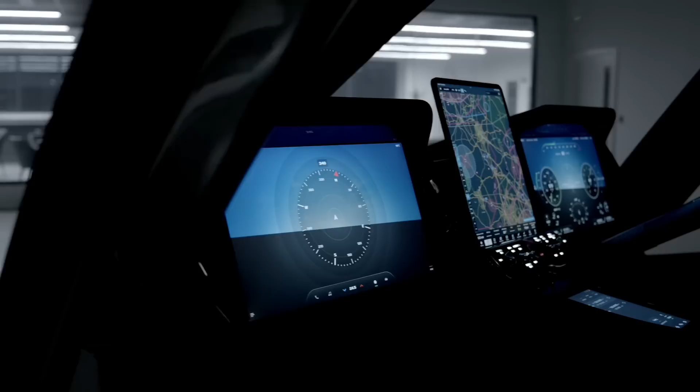Hill is an aerospace manufacturing company with one simple mission. We're making flying cool again. Our beautiful HX50 makes you want to fly, and by manufacturing everything in-house, we make it affordable so you're able to fly. Together, we're creating a general aviation renaissance. We call it GA 2.0.

For you, it means a breathtakingly beautiful new aircraft, ready for sustainable aviation fuels and connected for the modern world. Our all-new ownership operating system supports every aspect of HX50 ownership, from in-house insurance to comprehensive warranties and power-by-the-hour maintenance to pilot training and active safety management, keeping you and your family safe.

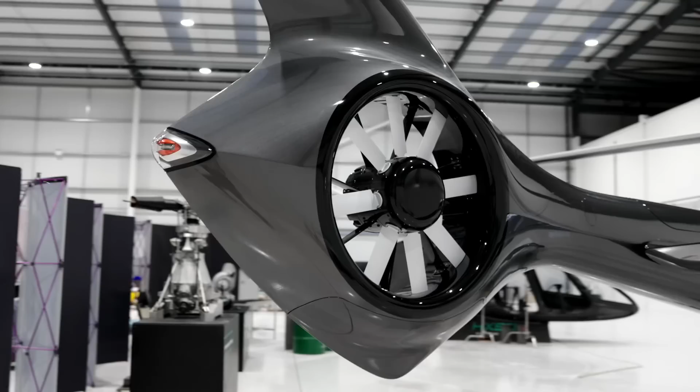Together, we've built the Hill Global Community, a place that provides easy access to the very best that the helicopter lifestyle can offer, globally and amongst new friends. Clearly, the scale of this task is vast. Create an all-new class-leading helicopter. Create a pioneering, affordable turbine engine. Create an all-new digital cockpit.

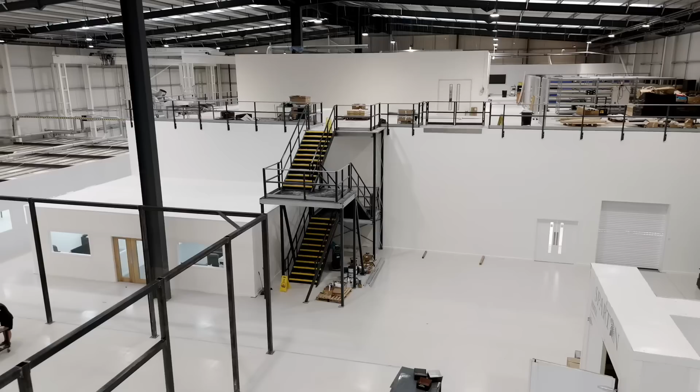And then create all of the processes and all of the infrastructure needed to manufacture every single part. Then build it, test it, and approve it. Tonight, we'll showcase all of the progress from across the program on how we're delivering on each of those objectives.

Producing a next generation turbine engine is a very big deal, but not because it's difficult. It's because it's absolutely crucial to being able to deliver next generation light aircraft at commercially viable prices. Consider this. There's less than £10,000 of expensive raw materials in an engine of this size and type. And the equipment to make these components has never been more readily accessible. And we have it all right here at PC1.

Sure, these machines are complex and extremely highly strung, but the design, analysis and testing equipment and the knowledge that we have available today right here at PC1 far exceeds what the guys that did this originally back in the 60s, 70s and 80s had available to them. That's not to downplay the difficulty of the task. This is difficult, this is complex, this will take time. But before we even start, we know that this has been done before. We know how to make this work.

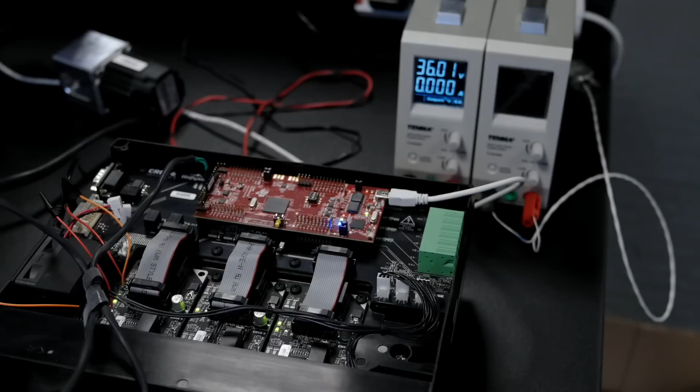Let me take you now through each of the parts of GT50, piece by piece, and I'll show you exactly how we're doing just that. Unlike traditional engines, the GT50 uses a high-speed, high-frequency, high-voltage direct drive starter generator unit. This unit consists of two groups of components: the mechanical assembly, which includes the rotor, the stator and the casing, and then the power management unit, which is all the electronics, hardware and software that control and operate the device.

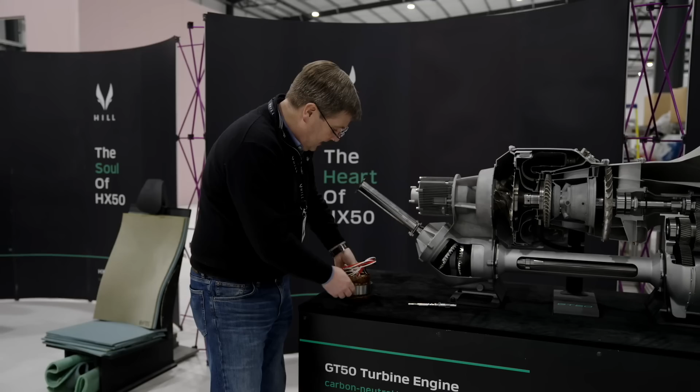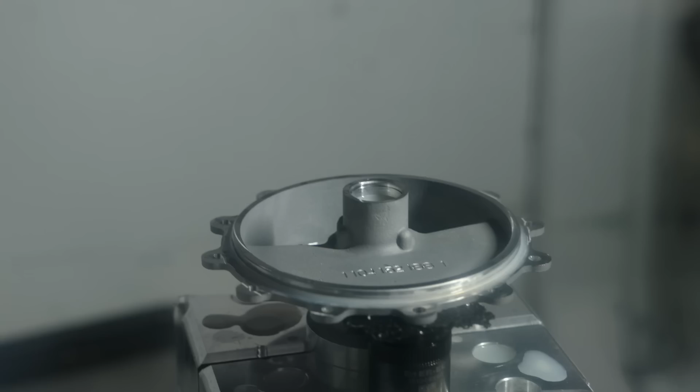We've now completed the prototyping of the drive shaft. This is the stub shaft that sits on the end of the gas generator and drives the rotor of the starter generator. And then also the stator and windings, so the laminations, the windings, and the wire terminations that come out of the back of it. And with those in hand and the final casing currently on the 5-axis machine, it's time to assemble it and test it.

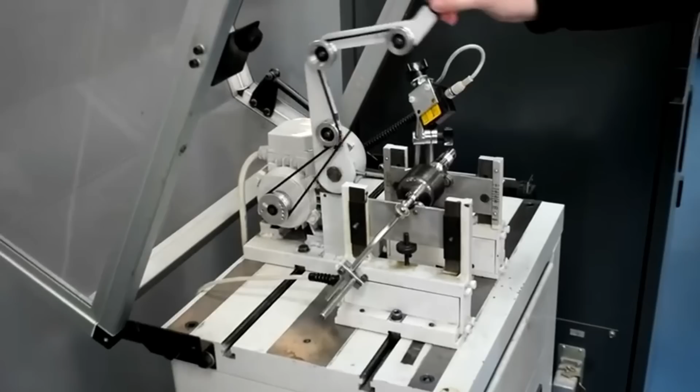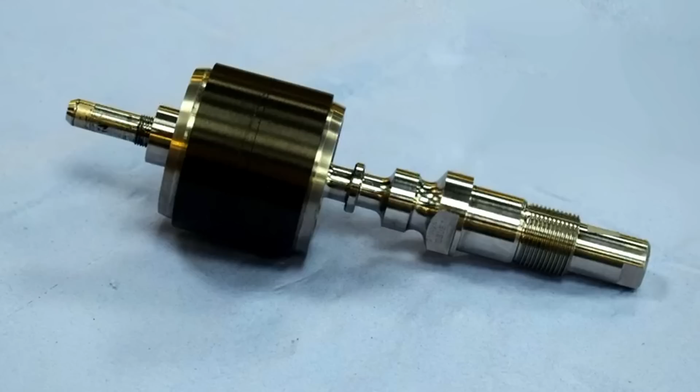Given that the starter generator runs at 50,000 RPM, it's important that the system is both statically and dynamically balanced to ensure smooth running and avoid harmful vibration. In order to do this, when we designed the rotor, we built additional areas of land on all of the rotating parts that can be subsequently machined away as the system is both statically and dynamically balanced prior to assembly and use on the test rig.

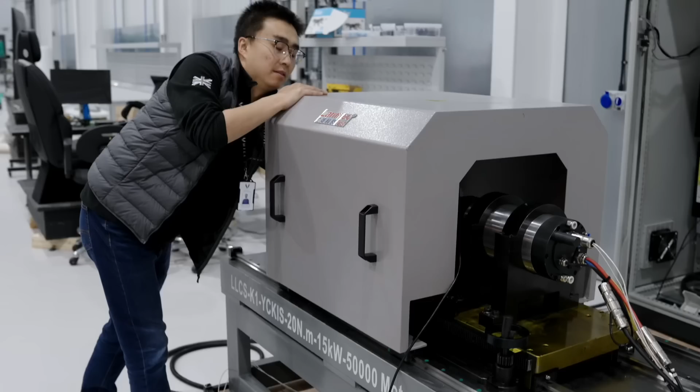With the rotor balanced and the stator electrically tested, the system can be assembled with its casing and connected to its brain, the PMU. In parallel with the development of the flight hardware, we've also been designing and commissioning the specialist test equipment necessary to test and qualify the system, and then building a lab around it. And here it is. This is our fully commissioned high-speed test rig, which is about to start testing the motor and generator functions of both the mechanical and electronic hardware of the starter generator.

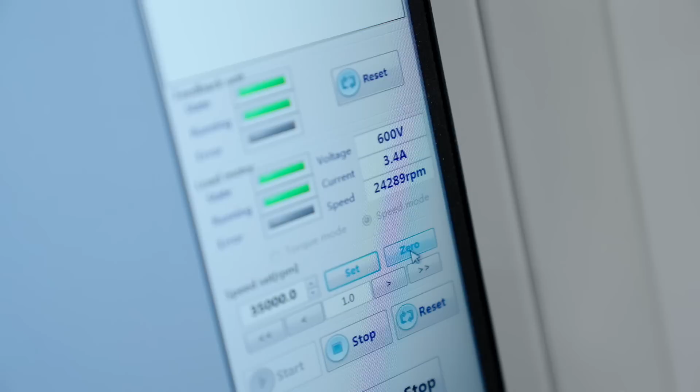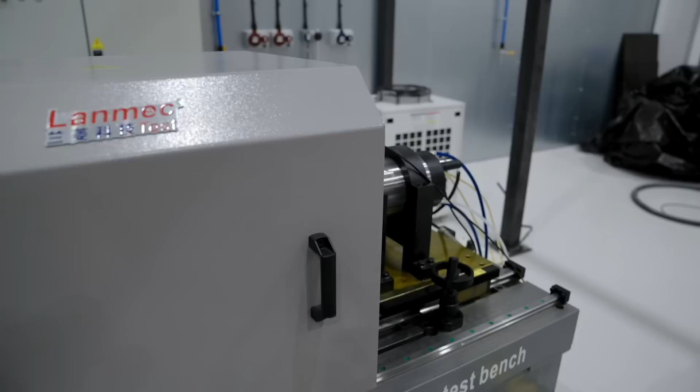This system allows us to prove every element of the performance and reliability of the starter gen across a wide range of operating conditions. Over the course of the next 2 weeks, we'll be mounting the first prototype starter gen system on the test rig and running the system throughout its entire performance envelope. And this major milestone marks the first module of the GT50 engine on the test bench and working.

Much of the time to date on the GT50 program has been spent developing the core elements of turbomachinery, since these consume the most technical resources and take the most effort in manufacturing, process development, and infrastructure development. With these elements now maturing nicely, we've turned our attention to developing some of the ancillary systems also required to make the engine function properly.

If you look at the front of the engine and its general state of dressing, you'll see much more equipment mounted to the front and around the engine to serve various onboard systems. Let's start by looking at the lubrication system.

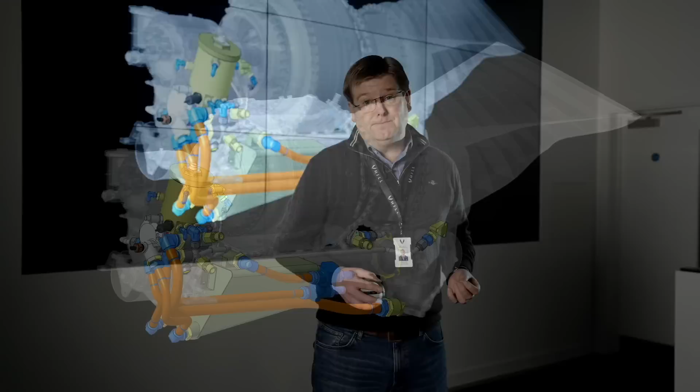Looking at the front of the engine, we've added the lubrication system hardware to the accessories module. At the front you can see the yellow filter body, the oil pump tucked in behind it, the oil distribution and scavenge lines, and the oil tank at the bottom of the engine.

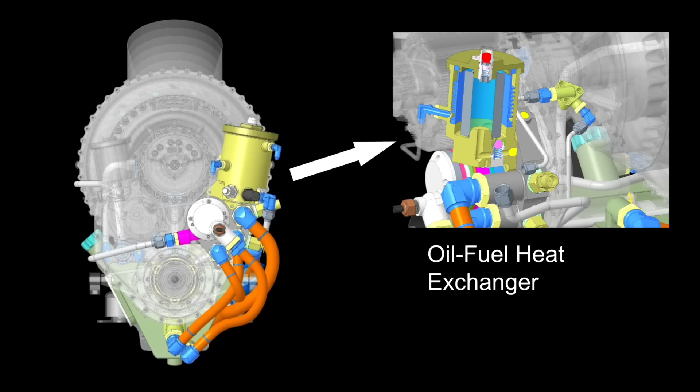The filter body at the top contains multiple functions. It acts as the oil filter itself, has the oil filter impending blockage warning flag, the pressure relief valve, and also the oil-fuel heat exchanger, which cools the returning oil and heats the fuel prior to injection into the engine.

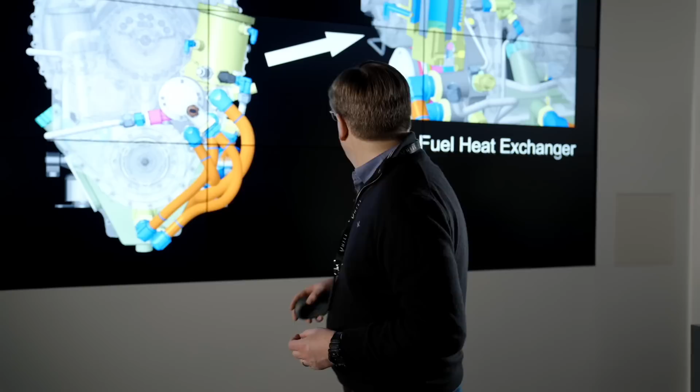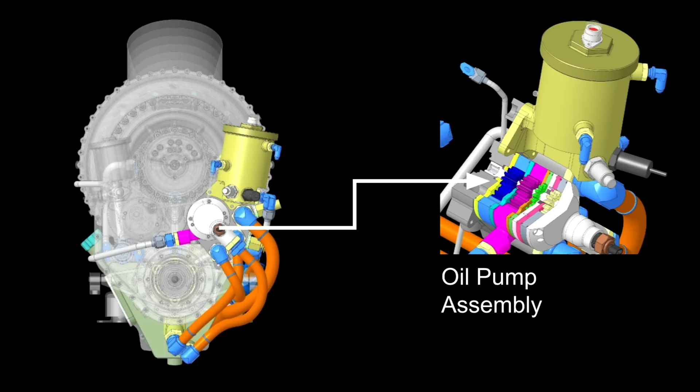Looking at the oil pump just below the filter body, we have a 4-chamber gear pump which provides one pressurized line of oil to distribute to all the injector nozzles and jets around the engine, and then 3 separate scavenge lines that pull the returning oil and returning air-oil mist back from various locations within the engine and into the filter body.

The oil tank itself is conveniently located at the front lower side of the engine and contains around 5 litres of oil, which is enough for all reasonable operations.

In addition to the lubrication system hardware, we've also now integrated the key sensor elements for the control and instrumentation system. On this image you can see the oil pressure sensor, the oil pressure switch, oil temperature gauge, the speed reduction gearbox chip indicator, the auxiliary gearbox chip indicator, and the rear bearing chip indicator as well, all conveniently located around the engine.

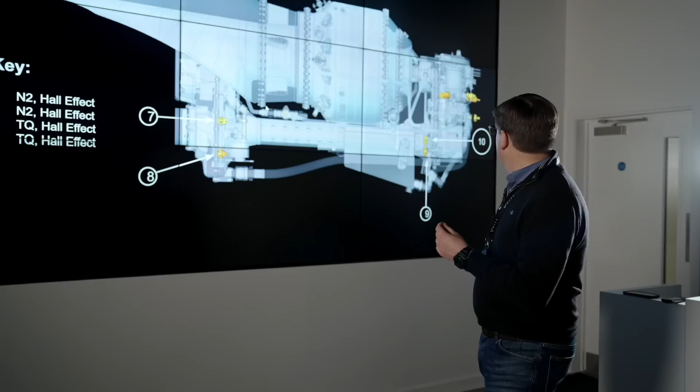In addition to this, we've also got the Hall effect sensors for N2 that are used to pick up the N2 speed, as well as the Hall effect sensors that pick up torque by looking at the distortion of the drivetrain throughout the engine. We've also integrated the engine mounts both at the rear and front end of the engine to secure GT50 to HX50.

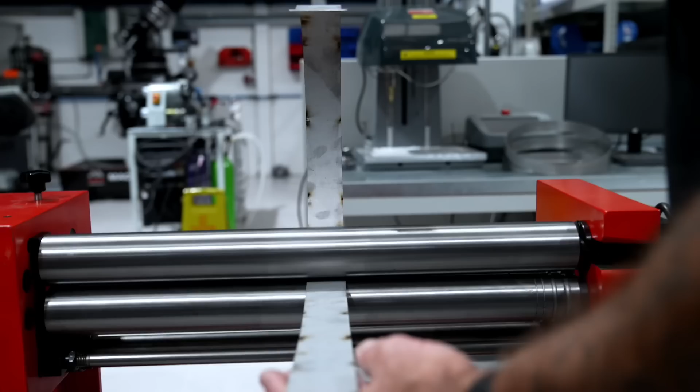GT50 uses a modern annular combustor comprising roll-formed, superalloy, laser-welded, interlaced rings. We featured the production of these rings and the development of those processes extensively in previous updates. Now it's time to bring all of that together.

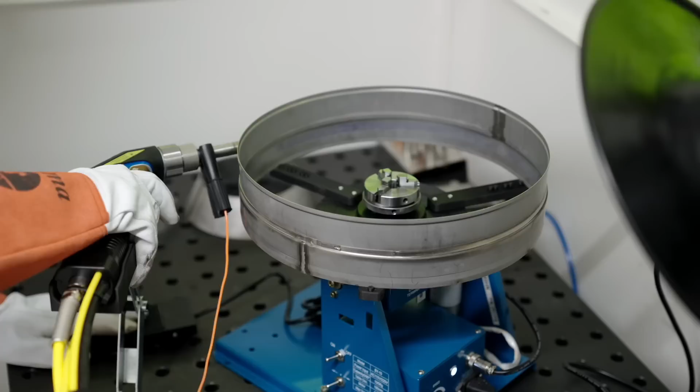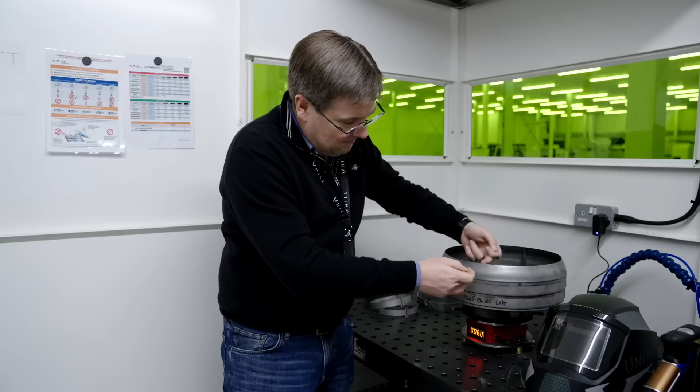Welcome to our precision laser welding facility here at PC1. Over the course of the last few weeks, the guys have been focused primarily on the processes necessary to take the individual rolled rings, assemble them in a welding fixture, and create perfect, repeatable, gas-tight welds between each of the layers of rings that make up the film-cooled combustion sheeting every time.

These processes are traditionally extremely labour intensive, so we've been focusing very much on how to jig and fixture these components so we can subsequently automate them and eliminate the labour content, making the GT50 combustion system as cost effective as possible.

One seemingly innocuous part of the GT50 engine that's crucial to the performance, efficiency, emissions and reliability of the engine is the fuel injection nozzles. Although these components are very small, their internal geometry is extremely intricate.

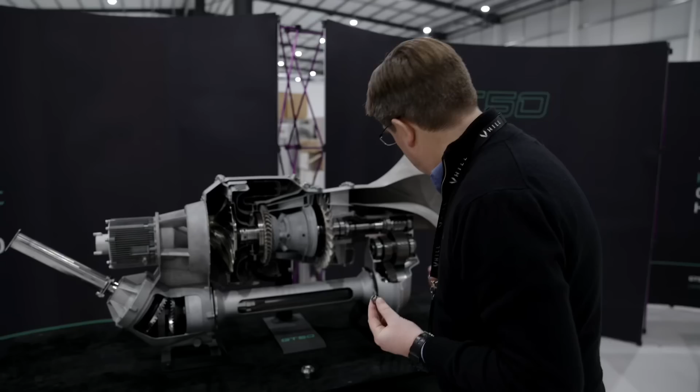The conical shape inside that nozzle, not dissimilar from the internal passages of a funnel, is absolutely crucial to delivering the cone angle of spray that we require, the mean and distribution of particle sizes as it atomizes, and the flow rates needed to guarantee both the minimum and maximum flow through the engine.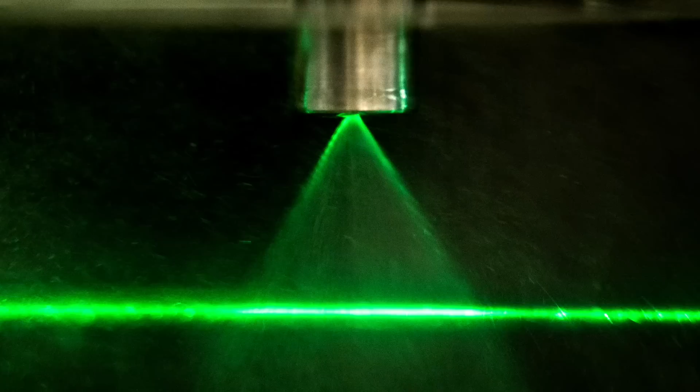In order to develop these to the point where we can freeze it for production, we've been doing a series of tests on our laser visualization rig to measure the cone angle from the nozzles, measure the flow rate, and study the atomization properties of a variety of geometries very close to the target geometry for the GT50 nozzle.

For decades, one of the greatest concerns of pilots owning a turbine engine helicopter has been the risk of an overtemp on startup causing huge amounts of damage. As you know, HX50 comes with a dual FADEC engine control system that simplifies all of that. The startup procedure is simply turn the master battery on, turn the avionics on, the avionics will come to life, and then simply press the start button and the engine will bring the whole system to life.

But what actually goes on behind the scenes when you press that button? The engine team and our controls team have been working tirelessly to develop every element of the control system that runs the fuel management and the starter generator, to bring GT50 to life and to maintain stable combustion and relight if required during the entire operating envelope of HX50. Let's go over and have a look at the Rufus rig, and I'll show you what this button actually does in practice in the GT50 engine.

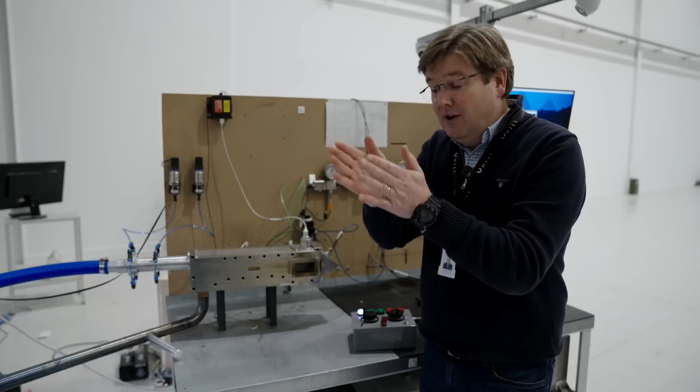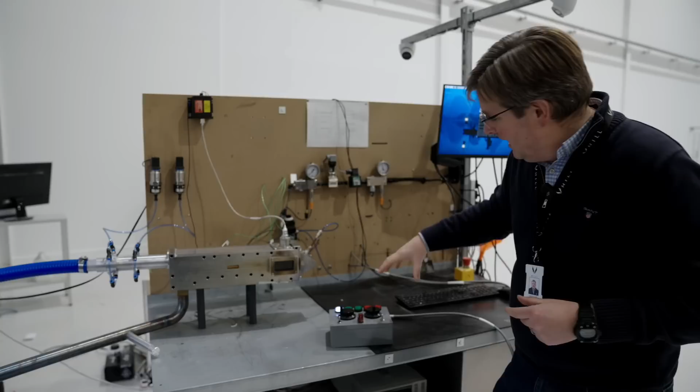This is the combustion test rig you've seen previously, which we used to develop the fuel spray nozzles, the ignition, the swirler and the general geometry of the internals of the combustion chamber for a single segment that we then repeat around the annulus of the annular combustor. Since we've completed that work, the rig is now being used to tune the critical internal core functions of the FADEC system that allows us to stably ignite the flame, control the engine as we ramp up to higher loads and back down to lower loads, and to do automatic reignition if for any reason the flame flames out during operational conditions. So we've built a representation of the FADEC system here to demonstrate that for you.

Essentially what goes on within the FADEC is the moment you press that start button, the first thing the system does is initialize everything. So it starts by initializing the fuel pump that you can hear there, priming the whole fuel system, so we've got high pressure fuel ready to be atomized through the nozzles.

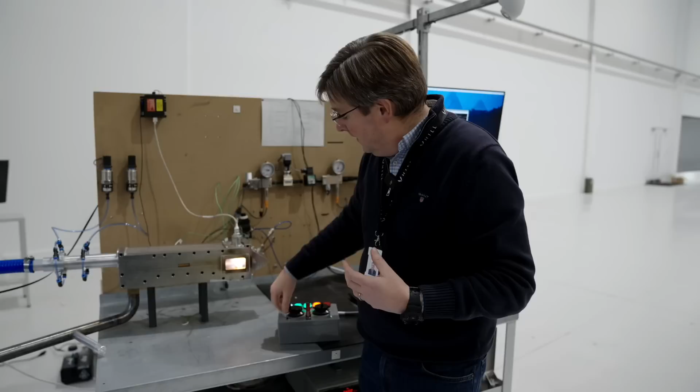When we then go on to start the ignition sequence, the first thing that happens is it'll start the starter generator and bring it up to speed to get sufficient air running through the engine to create the right air-fuel mixture for combustion. Once we've got stable air pressure, the igniter starts, then we inject the fuel, and following fuel injection we move into a governed mode of operation where we can ramp the engine up and down to different load levels to match the power required by the main rotor.

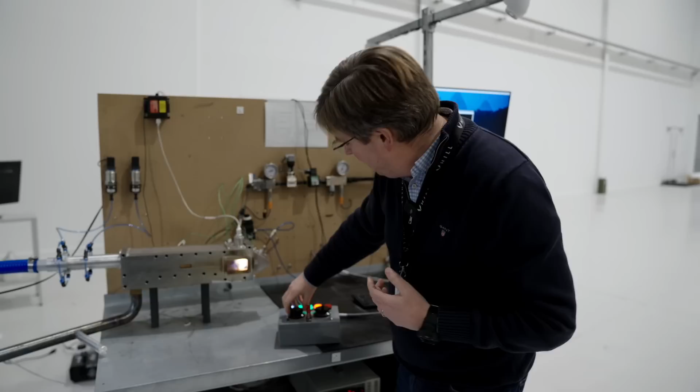So this knob here represents the rotor system demanding more load of the engine, so we can ramp up to full power or back it stably down to low power, and then as you pull the collective up, the engine has to produce more power again. All the while, we've got stable, efficient combustion going on within the combustion system.

Then once we ramp the engine back down and we're ready to shut it down, it can simply cut the fuel, back the air off once the combustion chamber's been ventilated, and stably shut the engine down with all parameters remaining under control at all times.

Now let's talk about the second major module of the GT50 engine that's ready for test, the drivetrain module. The drivetrain is responsible for reducing the output of the power turbine from 35,350 RPM down to a more usable 6,000 RPM to directly drive the tail rotor and as the input to the main rotor gearbox.

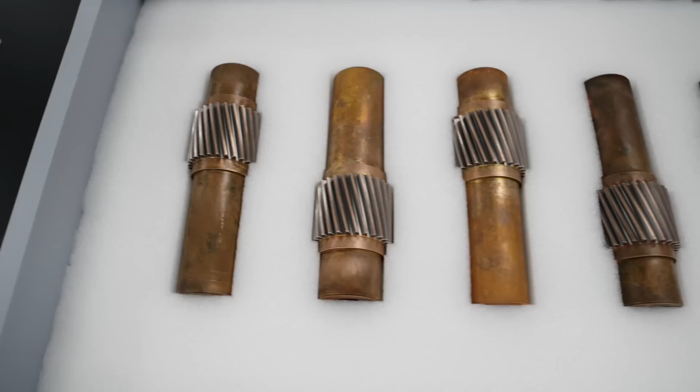We're currently producing 5 sets of speed reduction gearbox hardware ahead of testing them on our bespoke speed reduction gearbox testing rig. We've currently got conforming examples of all of the gear components copper plated and rough machined out for carburizing prior to being hard machined to final geometry. We're about to start machining the gearbox casings, and we've been working on all of the other shaft components, mounting components and bearings over the course of the last couple of weeks.

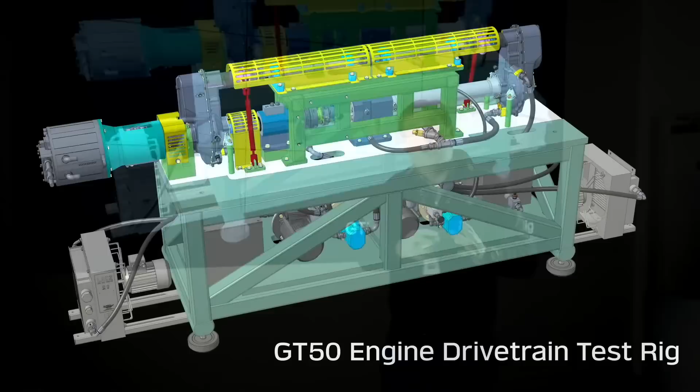Once all of that's done, they can be assembled onto our speed reduction gearbox test rig, which will allow us to drive 2 of the gearboxes back to back using an external drive motor and operate them throughout their entire operating envelope. This will allow us to verify the performance of the gear drivetrain itself, of the lubrication system, and of the general reliability, performance and efficiency of all elements of the system. This will in turn enable us to clear these components for flight testing next year.

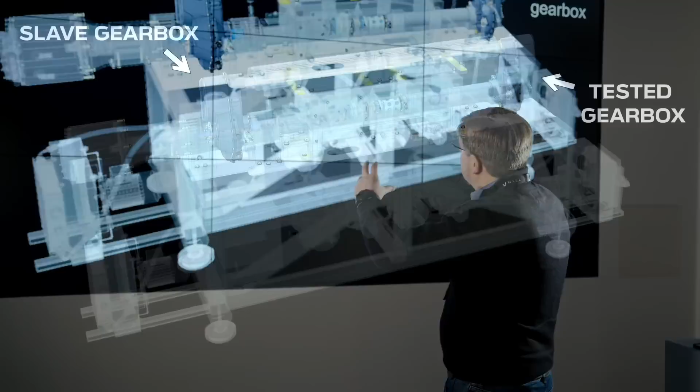If we take a look inside the speed reduction gearbox test rig, we have the tested gearbox mounted in the correct orientation, and then you'll notice we've got a second gearbox which is mounted back to it and is actually driven backwards.

That's purely there to load the tested gearbox, which is driven through the external motor. In between the components, you can see an adjustable torque coupling where we can wind the gearboxes up against each other, the torque measuring equipment, and a whole bunch of instrumentation to measure every single parameter of interest of the gearbox throughout the entire operating range.

With the gearbox separated from the engine, we use external lubrication systems where we can tweak and optimize all of the jets, all of the feeds, and all of the scavenge systems to get them set up just right for how they'll sit when they're working on the engine.

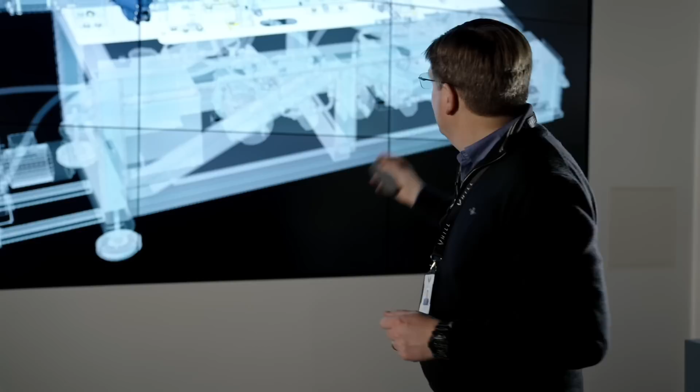Most of the componentry that you can see on the top is already made and is waiting in stores, and the major fabrication of the test rig should be with us by the end of this week, ready to be assembled by the end of the year.

Let's go down into stores and I'll show you the components waiting to be assembled. Welcome to the PC1 engineering stores.

What you can see here is essentially all of the components that I've just shown you in the virtual world, in reality, waiting to be assembled. Everything from stub shafts and couplings, manifold blocks, bearing blocks, major assembly housings, through to the hydraulic connectors, hydraulic hoses, and then the motors, pumps and drives necessary to run the lubrication system for the speed reduction gearbox test rig.

We've also got all the seals and all of the sensors and the machine guards necessary to construct this sophisticated piece of test equipment. Over the course of the next couple of weeks, these components will be joined by the major fabrications onto which they can all be mounted. They'll be assembled over the other side of the hall in the mechanical assembly room before being taken downstairs, mated with the first two speed reduction gearboxes, and then that'll be the second module of the GT50 engine on the bench and working.

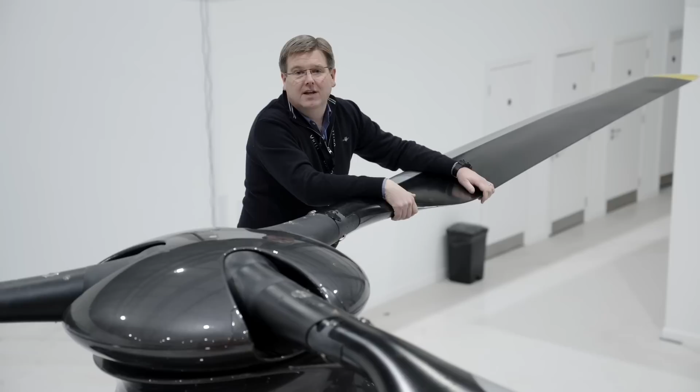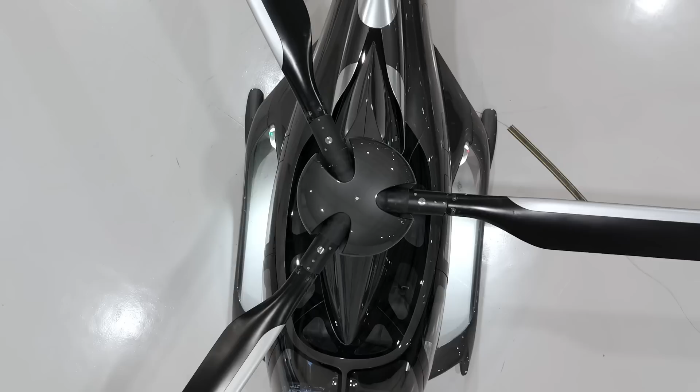Amongst the crown jewels of any helicopter company is the rotor blades and the associated technology. Our highly optimized aerodynamic design is responsible for HX50's high cruise speed, but with high cruise speed in any helicopter comes the risk of unacceptably high vibration.

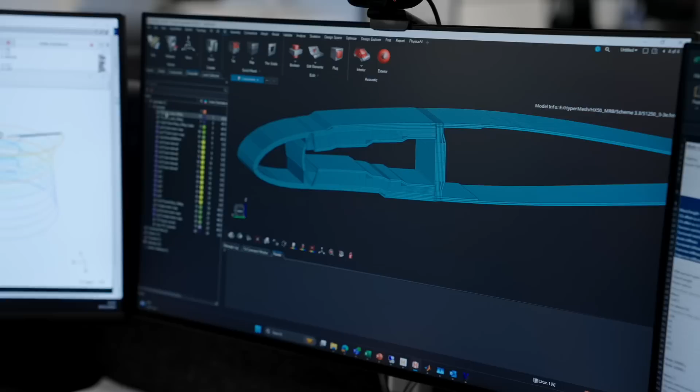Over the course of the last 9 months or so, we've been working extensively to optimize the dynamic design of HX50's rotor, our cabin suspension system, gearbox mounting system, and the overall structural dynamics of the airframe itself. We've been using modern finite element analysis to optimize the structural stiffness, mass distribution, and general aeroelastic design of each HX50 rotor blade, ensuring that all of the natural modes of vibration are placed as far away from exciting frequencies as we possibly can.

In addition to that, we've taken a very bold move to minimize the amount of vibration that can be transmitted down to the fuselage, making HX50 the smoothest 5-seat helicopter in its class. With this crucial work now behind us, we'll be in a position to freeze the dynamic design of the rotor by Christmas, and then in January, we'll start making elements of the rotor blade for elemental testing before making full rotor blades for full scale testing.

As the Gen 2 fuselage matures rapidly, we're taking the last few fleeting opportunities to bake in the last of the improvements that we've picked up on various systems around the airframe. During Heli Expo and also at Duxford, some customers noted that the forward skid leg obscured quite a significant proportion of the cabin door opening, limiting the ease with which you can get into and out of the cabin.

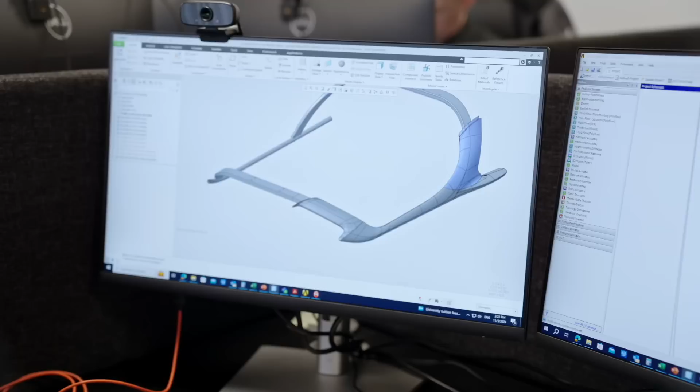We've taken the opportunity prior to freezing the second generation fuselage to just shuffle the whole skid mounting point forward slightly, and also to reduce the chord of the skid pan aerofoil profile here, both reducing the drag and also the weight, making a better all-round skid design that looks basically identical to the one that you see here.

In addition to that, we've also slightly shrunk the track of the skids in order to make sure that the unit will fit inside a shipping container without having to remove the skids.

While we've been doing this work, we've also been finalising the internal structure of the skids to really squeeze every last bit of weight out of the system that we possibly can, in addition to updating the way that we mount the skids back to the fuselage with the dampers necessary to maximise the performance of the isolation of ground resonance instabilities for the aircraft at large.

All of these things have gone to plan over the course of the last couple of weeks, and we're expecting to be able to freeze the design of the skids just after Christmas, ready for testing early in the new year.

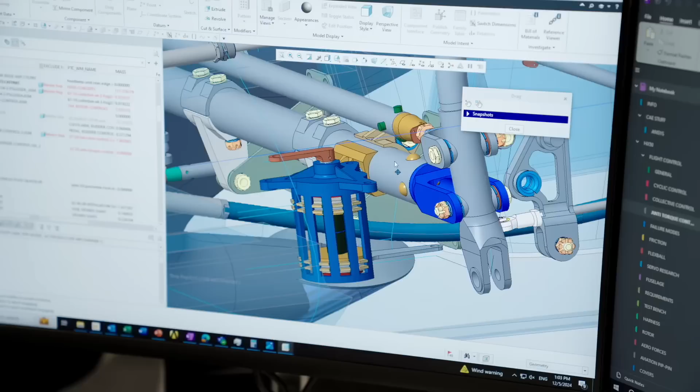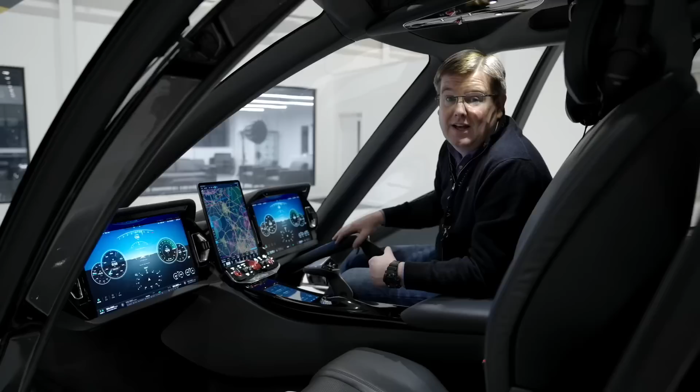In addition to that, we've now implemented all of the friction packs so that the aircraft, when it's on the ground, can have friction applied. And then on top of that, we're currently updating the stick head design here to take account of a couple of modifications in how we want to trim the sticks, as well as the latest layout of the buttons and the switch packs and backlighting that go into the head of the stick and present to the pilot.

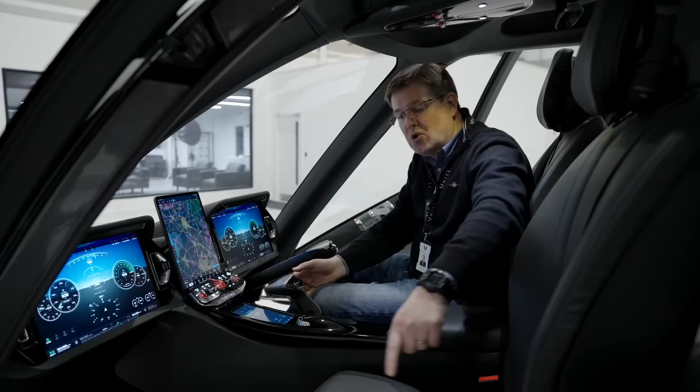We've also made similar progress with the development of the control linkages for the collective control. The main news here is that we've made a subtle modification to the pivot point underneath the cabin floor, bringing it slightly further aft. This allows us to use a common axis for both the pilot and the co-pilot's flight control without the stick head for the co-pilot blocking his entry and egress into the cabin. This has made the system significantly simpler, significantly lighter, and again stiffer, leading to an improvement in flight dynamics characteristics.

We've also implemented a new stick head with new button packs on the collective, as well as adding the friction system, which will be deployed down here at the base of the collective lever.

The last of the flight controls to be developed is the fully adjustable pilot and co-pilot pedals. The pedals in HX50 are a little bit more complicated than they are in other light helicopters on account of we have to facilitate for the wheeled version where we need toe brakes. So that's a toe brake system that's also fully adjustable to give the range of accommodation for the different size occupants that we want to within the aircraft.

We're currently trading off two versions of the pedal design, one that's fairly traditional and carries the brake cylinders with the moving assembly, and another that uses a reference mechanism to stationary brake cylinders that are buried in the floor. As soon as we've got the trade-off completed on that, we can freeze that, and then essentially all of the mechanisms behind the flight controls can be frozen, and again we're ready to build them and put them on the test rig.

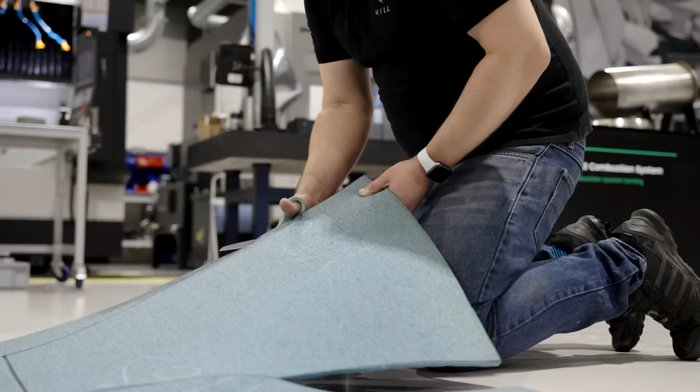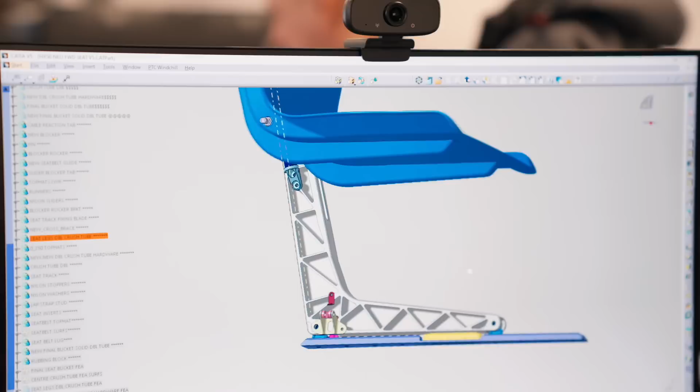It's generally acknowledged that helicopter seats are in fact instruments of torture, and I'm absolutely determined for that not to be the case for HX50. Over the course of the last 6 to 12 months, we've completed extensive comfort trials and integrated all practical customer feedback. In doing this, we've now created improved comfort surfaces and milled these surfaces in several grades of airworthy carbon-laced foam to enable us to carry out the final stages of comfort trials before freezing the crew seat around the existing mechanical design that has now been frozen, passed the structural analysis tests, and has been approved and ready for production by our production engineers.

As you've seen previously, we've also completed the isolated energy absorber tests required for the crash cases. And with the final comfort trials completed and the mechanical design matured and released, we'll be able to release the seat for production, prototyping, and then testing early in Q1 in 2025.

One of the areas of the airframe that we were cognizant we needed to improve over these early prototypes was the quality of the forming of the large transparent panels that make up the windshield. Welcome to our all-new glazing production facility here at PC1. This facility has been specifically developed to produce vacuum-formed and drape-formed transparent panels for impact and non-impact resistant windows across the platform.

In order to produce optically perfect windows for HX50, we've developed a new approach to tooling both for polycarbonate and acrylic, including new ways of fixturing and holding the hot, flexible material down onto the tool during the forming process. Over the course of the next few days, we'll be trialing these methods to demonstrate the capability of the newly developed process.

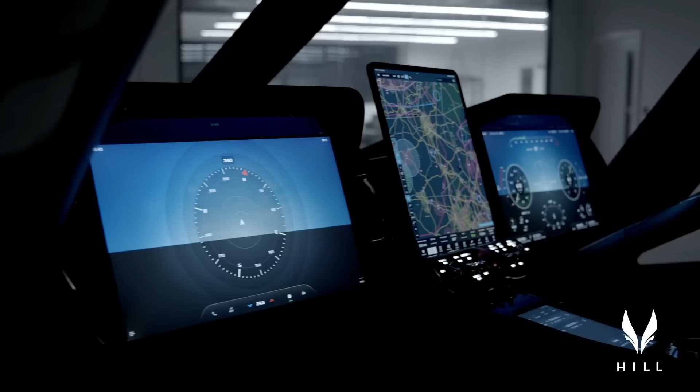Today marks another important milestone in the development of HX50. We've now frozen the primary flight display design for the digital cockpit, meaning that Eric and his team can now get on with the important business of implementing this software on the target hardware, ready for testing before year end.

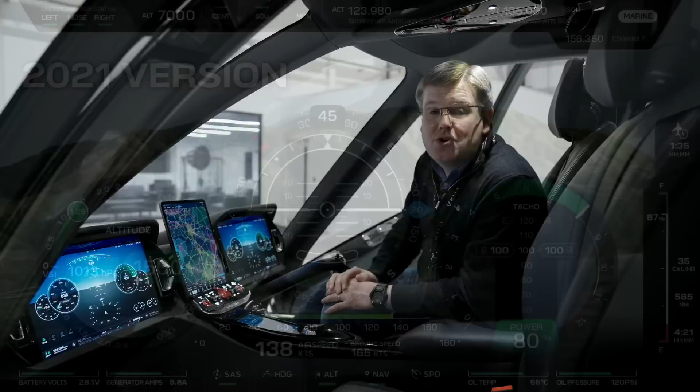The design itself has gone through numerous iterations over the course of the last 2.5 years, gradually evolving from piloted flight tests, customer feedback, and a consistent pursuit of perfection in terms of combining the best elements of traditional analog gauges with all of the benefits of modern digital displays. The production version of the PFD is crisper, cleaner, and more refined than ever before.

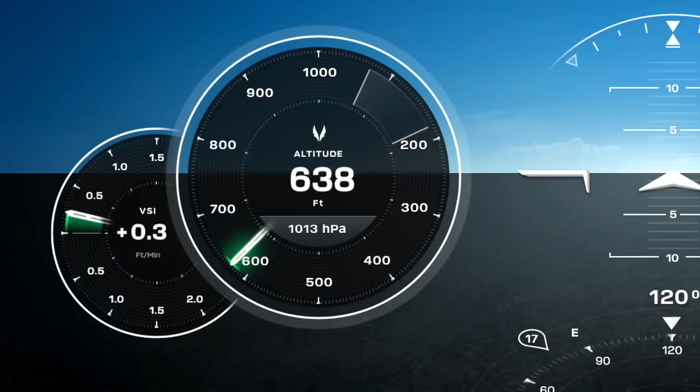Airspeed is now conveniently positioned at the top of the display with a simple curved arc giving a needle as well as a digital display. Our new and novel altitude indicator brings the best of analog gauges and digital readouts while only using one needle to present your altitude, irrespective of how high you are above sea level. This is combined with a large, easy to read vertical speed indicator and the large power indicator that's always been a primary feature of the Hill digital cockpit.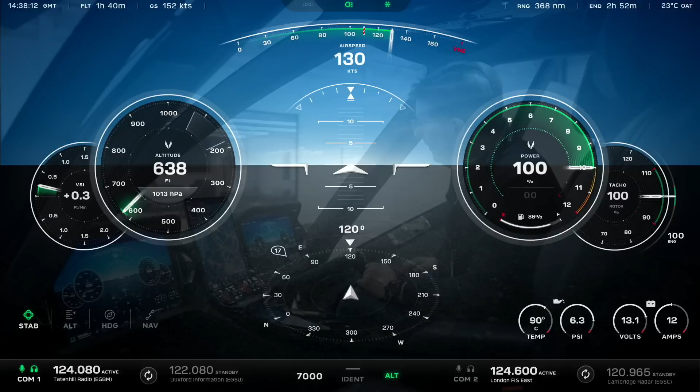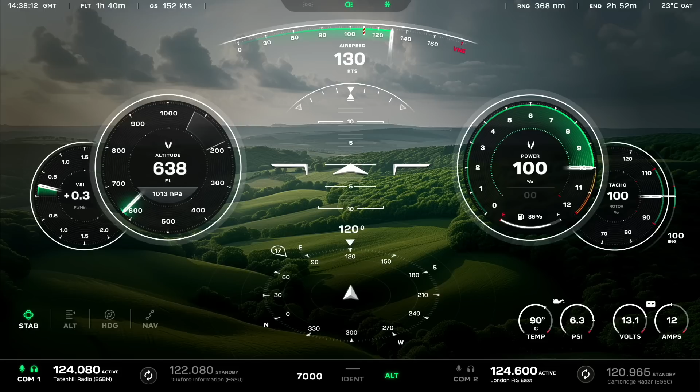The rotor and engine tachometer are now crisper, clearer, and easier to read than ever before, with the engine temperature and electrical gauges provided at the bottom of the screen and a homogenized communication and transponder bar. As in previous designs, we've also got the pass-through layer that provides video footage as a background from the camera installed in the nose light in the front of the aircraft. And the colour schemes have all been adjusted to work perfectly with this.

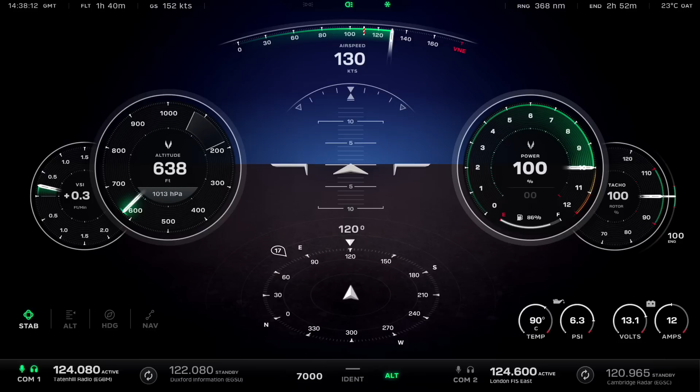We've also provided the toned down night theme that makes the contrast more appropriate for night flying so as not to glare in the low light environments. And then finally, we've also integrated with that the infrared pass-through layer to make flying at night safer than ever before. Welcome to the new avionics laboratory here at PC1.

In this facility, Eric and his team will be implementing the production variant of the primary flight display for the DigiCockpit on target hardware and then connecting all of the peripherals through the target hardware with the control interface ready to be fitted onto the aircraft. They'll start with the PFD and then move on to the IPI and the MFD to bring the full system into aircraft ready status.

With the DigiCockpit software implemented on the target hardware, then the very next stage is to connect up all of the peripheral devices such as the GPS source, the transponder, the comm radio, the audio panel, and the various other bits and pieces. Get those integrated with the production wiring loom, all of the switches, the hardware, the circuit breakers, and get the whole system working, laid out on this pegboard prior to being transplanted onto the first flying HX50.

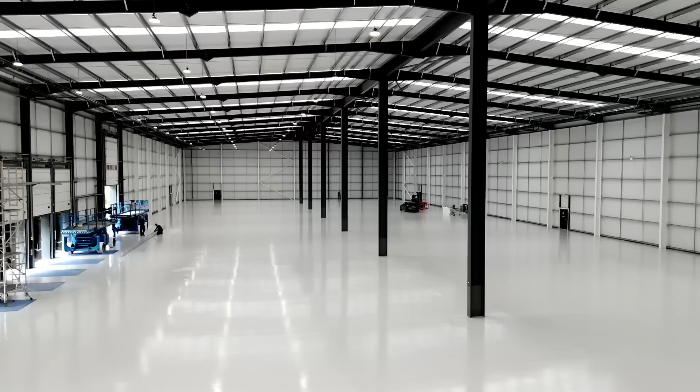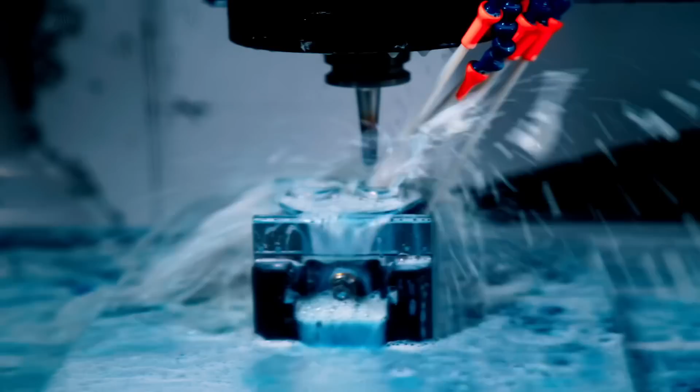Well, what a journey it's been. From 3 small development centres in Rugeley, to a cavernous empty unit in Stafford, to a completely vertically integrated helicopter production facility capable of producing essentially every part of HX50 from raw materials, at a price that will stir general aviation back into life. A uniquely extensive capability, and all done in just 9 months.

Standing up here on the mezzanine level, you can see the full extent of the end-to-end composites manufacturing facility that we've built here at PC1. Down below me, our trim shop is now operational and producing patterns and molds for the HX50 program. Our gantry mill and associated dust extraction system is now fully operational and already producing patterns, molds and tools.

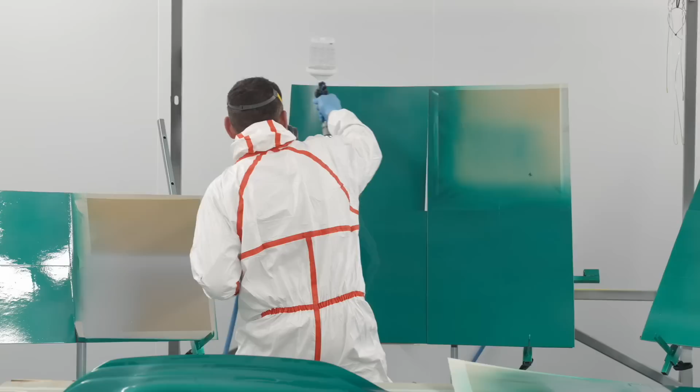Our large-scale composite curing oven has now been fitted with an upgraded temperature control system and is operational and ready to cure composites. Behind it, you can see the new paint facility that's fully operational and already producing painted components for the HX50 program. The final piece in the production puzzle for advanced aerospace composites is our laminating clean room that will be finished over the next couple of weeks. Let's go and take a look.

The new laminating facility sits right next to the trim shop where the patterns and molds are made that we then use to laminate into. The whole layout of the facility is designed to reflect the way that material flows around the facility, with molds and pattern storage over here, materials and goods inwards into the laminating facility just through this door here, which then flow in turn into the kit cutting area.

Let's take a look. When the raw composite materials arrive at PC1, they're brought into this temperature and humidity controlled storage area. They're held here in tip-top condition until they're called off to go into the kit cutting area, ready to be laminated. As we move to productionize the Gen 2 fuselage for high volume composite production, we've taken this opportunity to invest in our very first CNC kit cutting machine.

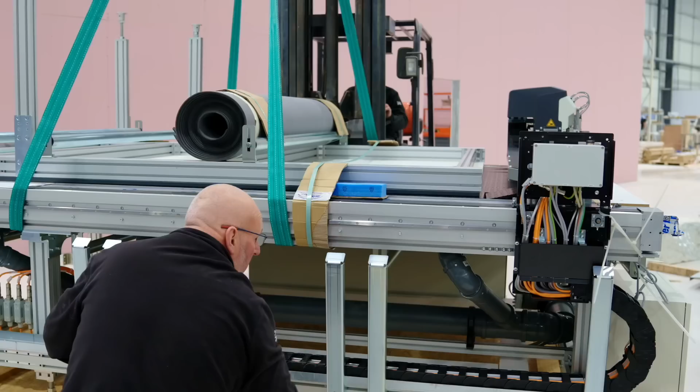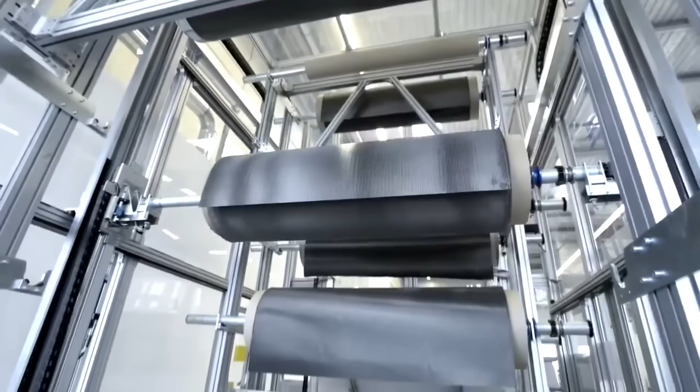This replaces the laborious hand templating and trimming of the individual layers of carbon fiber that need to be painstakingly built up and laid really carefully into each mold to make every element of the structure, with an automated process that deploys rolls of pre-preg carbon fiber onto a table where a CNC cutting knife will then come and nest and individually cut out each of the shapes required to make up every single laminate that goes into every molded part of the structure.

This is our first CNC kit cutting machine, and it's going to be used to develop out all of the processes for making highly controlled, high quality aerospace composite structures. This vast space, when it's completed, will be our clean room laminating shop. It's sized as such that we can lay out all of the tools and fixtures necessary to produce the entire HX50 airframe in parallel and have multiple teams of laminators working on these to hit the production rates that we need to.

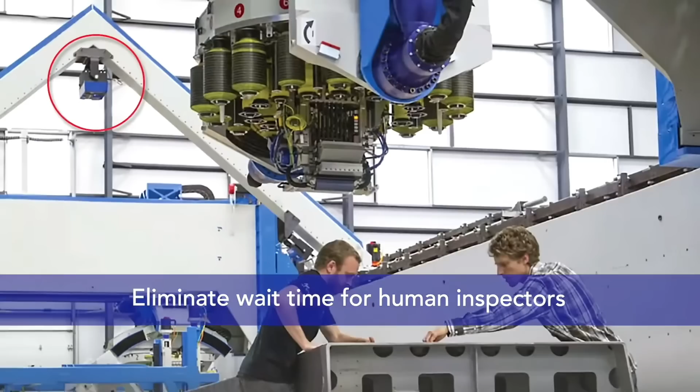In this environment, the temperature will be controlled, the humidity will be controlled, it will be dust-free and positively pressurized to maintain an absolutely clean environment to produce high-quality composite components every time. In addition to the environmental controls, we've invested in laser ply placement technology, which means that on top of the complex shapes that form HX50's mold tools, we'll be able to project laser guidelines that tell each laminator exactly where to place each of the CNC kit elements into the mold, ensuring that we get the right components with the right fiber orientation in the right place every time.

And what's more, this technology allows us to create a step-by-step digital record of every stage of the laminating and manufacturing process, ensuring that each and every structural part is made perfectly every time. Within this environment, all of the laminating will take place, all of the vacuum bagging will take place, and finished sealed molds will be assembled, vacuum bagged, drawn down under vacuum, ready to cross the walkway over there into the oven for final curing.

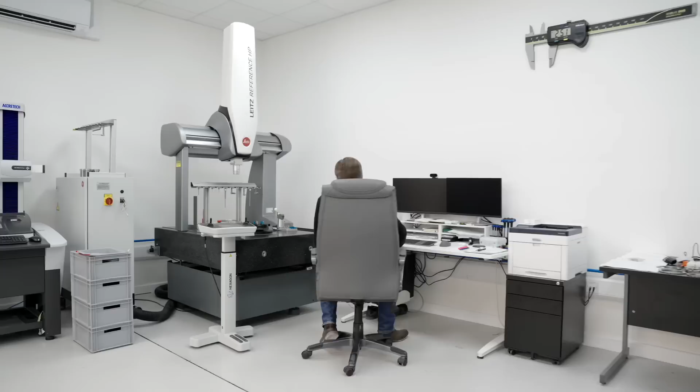Our precision machine shop is now fully calibrated and fully operational. The new production control system using smart factory technology is currently being set up so we can monitor the operation and throughput of every machine within the machine shop. We've also completed all of the laser alignment of each of the CNC machines, meaning we're back to hitting the tightest possible tolerances. We've also now completed all of the recalibration of our metrology equipment, meaning once again we can produce and measure parts to the highest imaginable tolerances.

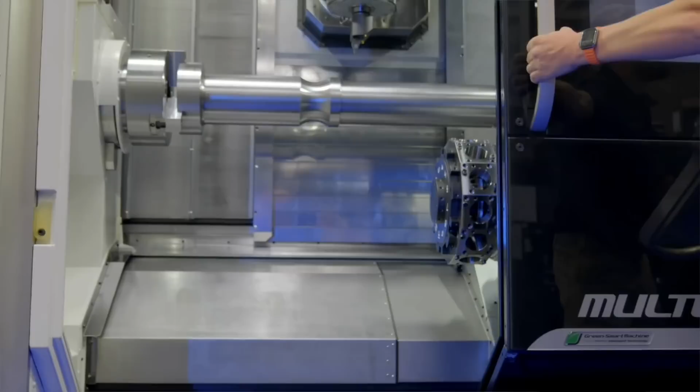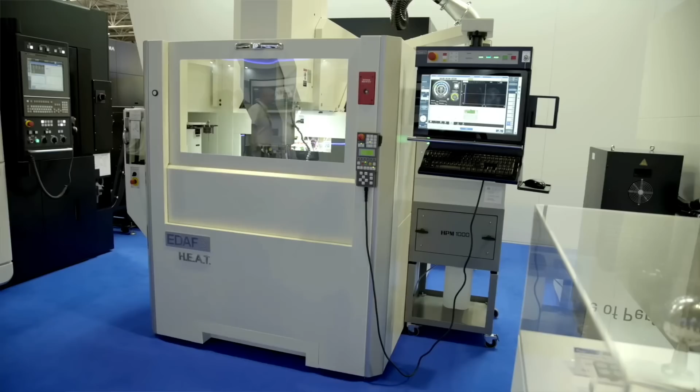And in readiness for the deluge of precision components that we'll shortly be making for both the engine and the drivetrain components, we've just completed a further investment cycle, investing in a new mill-turn machining center that will allow us to produce complex multi-axis components from billet to finished component in a single operation. We've also invested in a new EDM machine that will allow us to put fine hole details and all of the cooling hole details into our in-house cast turbine blades.

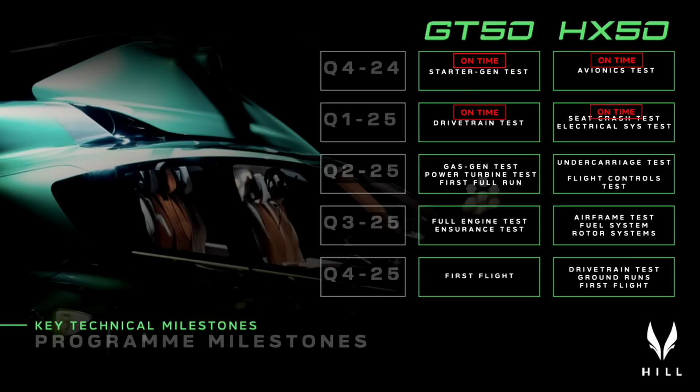Tonight, we've shown you that the starter generator is being built right now, the test rig's ready to go, and the starter generator testing will commence before the end of the year as planned. Similarly, the avionics PFD user interface has been frozen. The system is being built in the avionics test lab upstairs, and again, testing will start before the end of the year as planned. Early next year, the electrical system, the crash-worthy seat, and also the drivetrain will start testing as planned. All 4 deadlines on schedule, on time.

We set ourselves an epic challenge: build the finest 5-seat helicopter ever, which in turn needed the most cost-effective light turbine engine ever. To do this, we've had to vertically integrate an entire aerospace supply chain. Sounds like a tall order, and it is. But our factory will be home in time for Christmas. GT50 will run for the first time by the 28th of June 2025, and HX50 will take to the air for the very first time by the 20th of December 2025. GA 2.0 is coming. 2025 is our year.